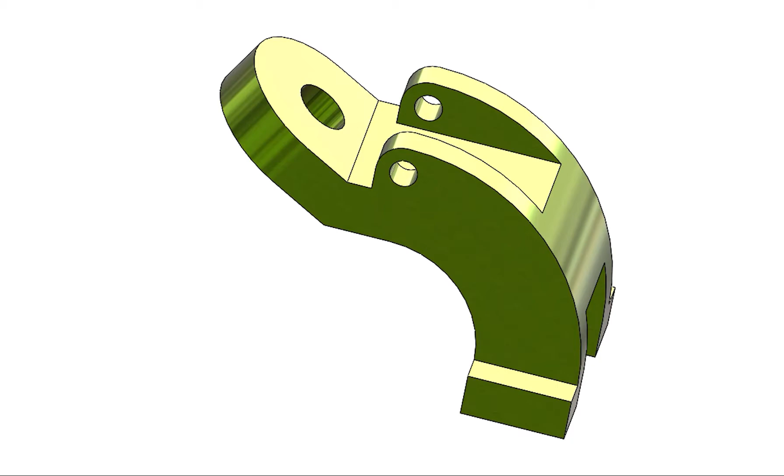This is a very simple part. It is 30 millimeter from here, 12 up, and 30 millimeter radius of this arc, and 60 millimeter of this arc. It goes up here, and this is the center, the same center for both arcs. This arc is 8 millimeter, with an 8 millimeter hole, 7 millimeter here, and 7 millimeter from here.

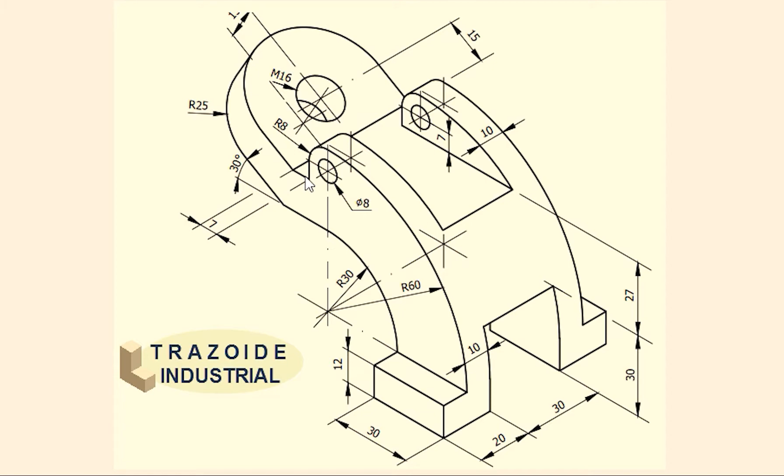So let's start. We'll go step by step.

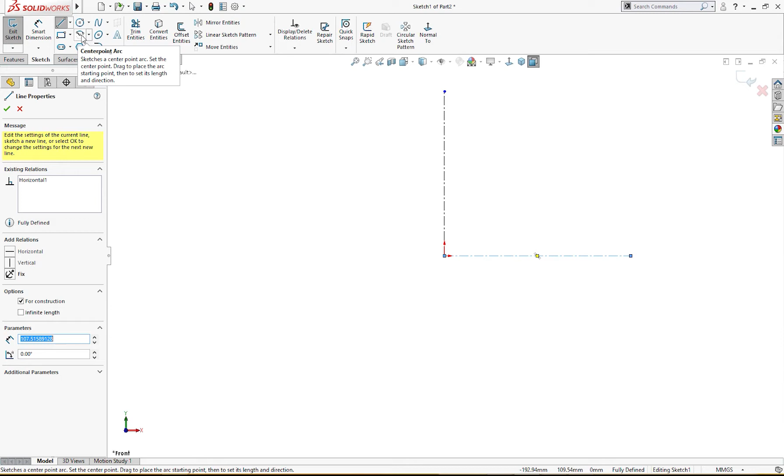A new part. On the front plane, I will draw a sketch of center lines like so, and I will draw a center point arc from 30 radius from here to there. I will trim the extra, and I will go from here 60.

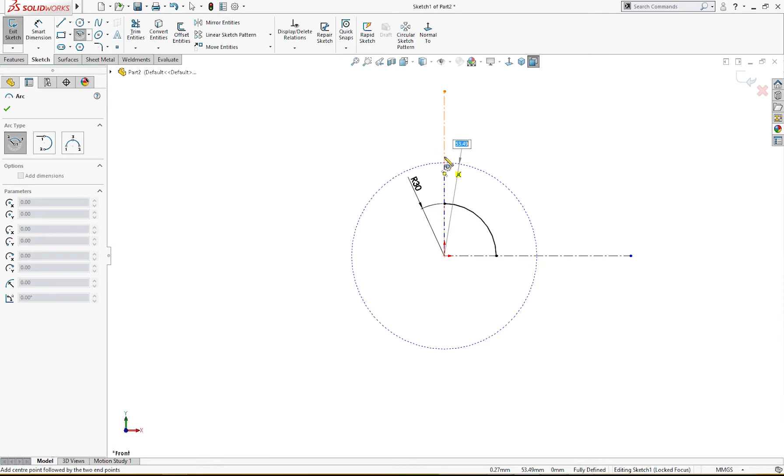I will trim this, take this and this. This radius is 30, and this radius is 60 millimeter.

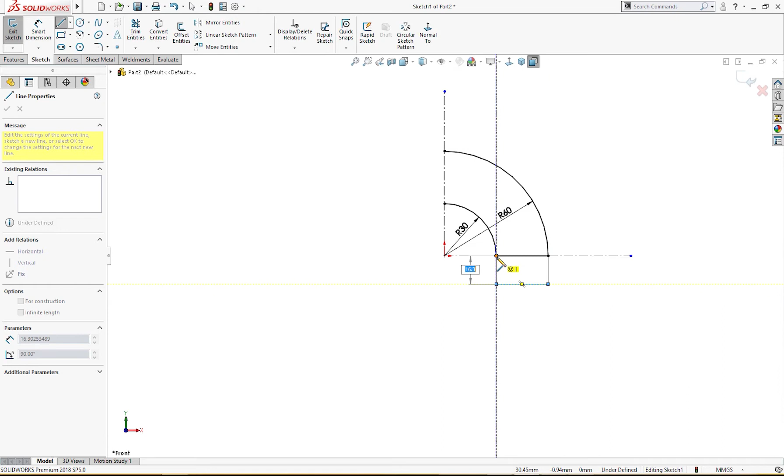I will draw lines to connect this to this, and again draw a line from here to here, here and there. This is 12 millimeter, and this is 30.

I will draw a line, go back again and convert it into an arc. I will go down 7 millimeter, 7 millimeter here, and 40 millimeter there.

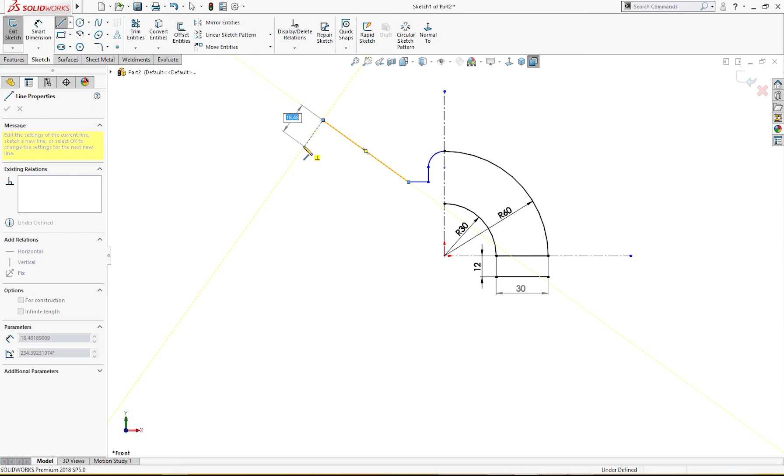Let me give the dimensions. This is 8 millimeter, this is 7 millimeter, and this is 7 millimeter also.

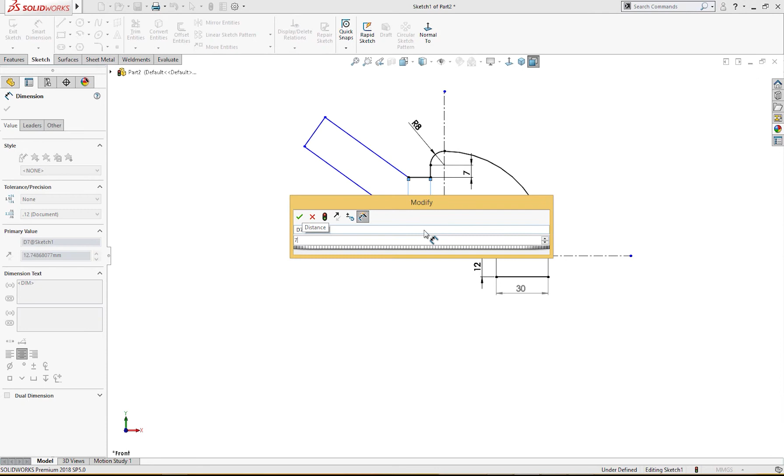The angle is 30 degrees, and this is 15 millimeter, and this from here to here is 40.

The sketch is fully defined. Only one thing left is a hole here of 8 millimeter.

Now let's extrude it. Everything looks fine.

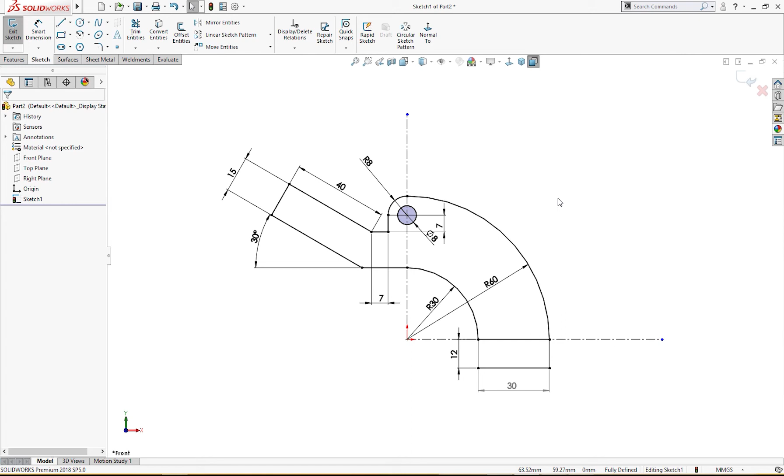Extrude, mid plane. I will extrude this, only mid plane, up to 50 millimeter.

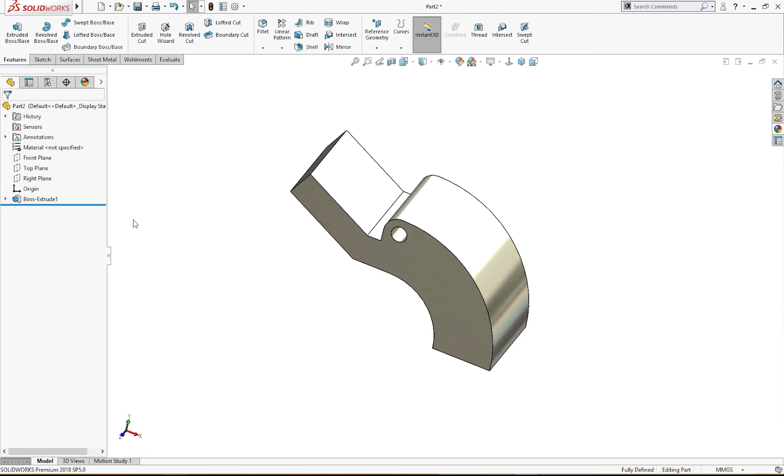I'll wake this up again. Extrude base boss, I will take this mid plane 70 millimeter, like so.

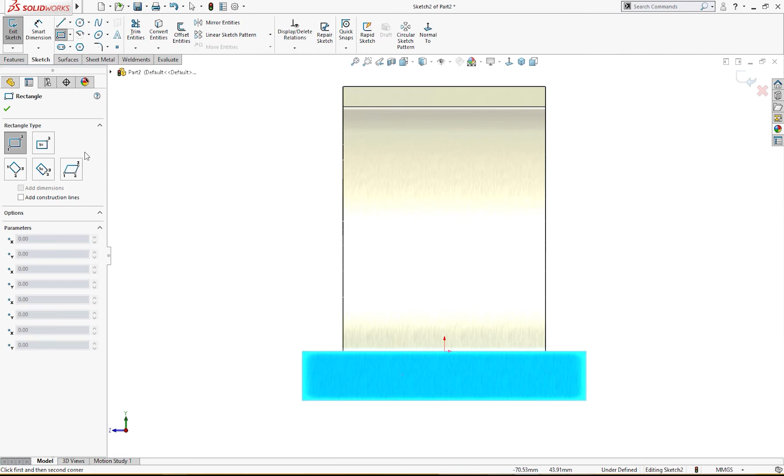I will draw a sketch here on this face, like so, and another here. Let's take it a little bit above. These two are equal.

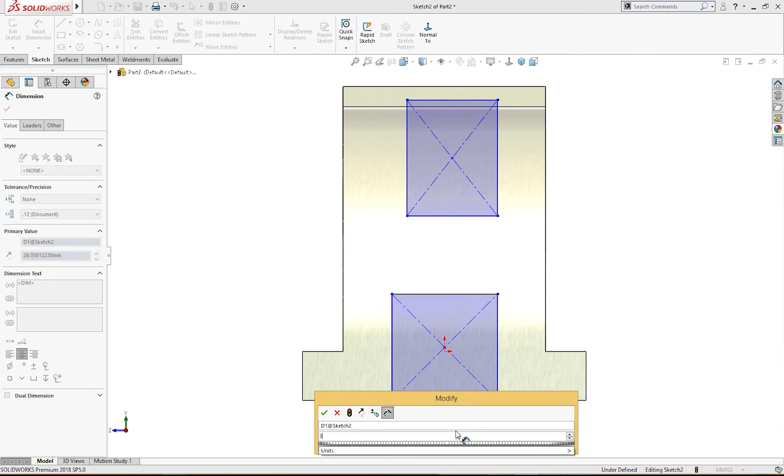This and this one are equal, and this is 30 millimeter, which is the cut. This and this is also the same, 30 millimeter. Let's define these 3 points into horizontal relation, 27 millimeter from here.

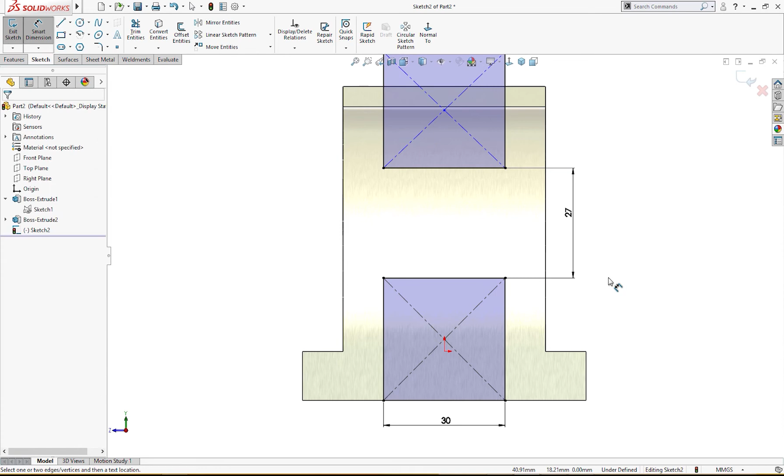We will give this dimension, any dimension will do, as long as it is above this face. I think it is okay. We can cut it now. Sketch is fully defined.

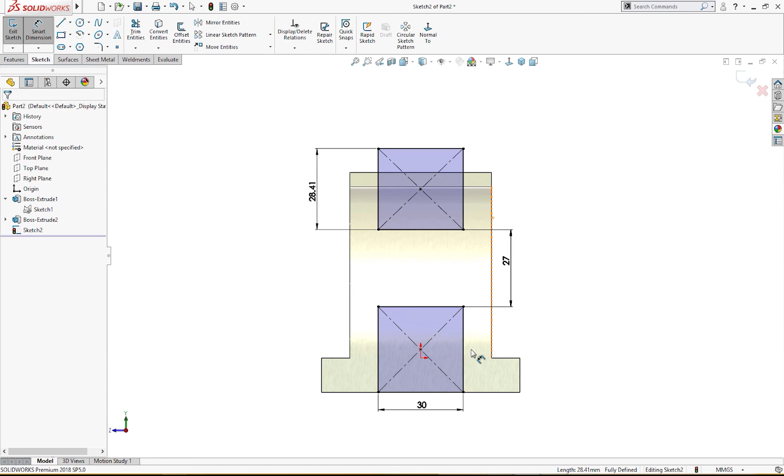This is 30, okay, this is 30, this is no problem, this is 30 also. We will cut it up to this surface. I will double click it, and there is no problem here.

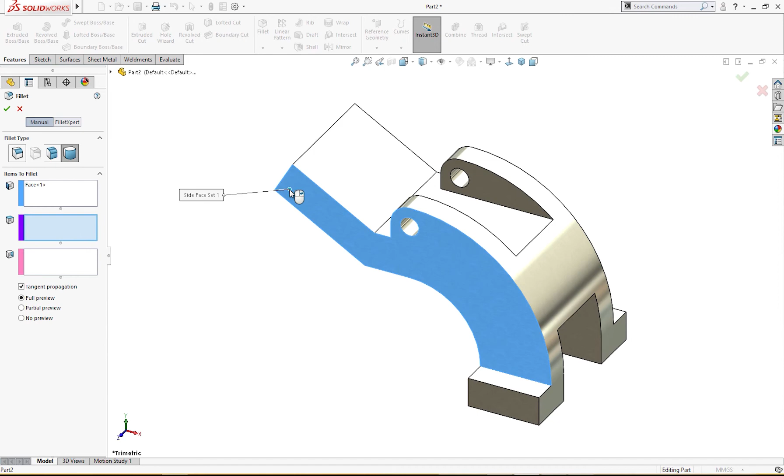This one is complete. Now I will go for fillet, full round fillet. I will click this, this, and this, like so.

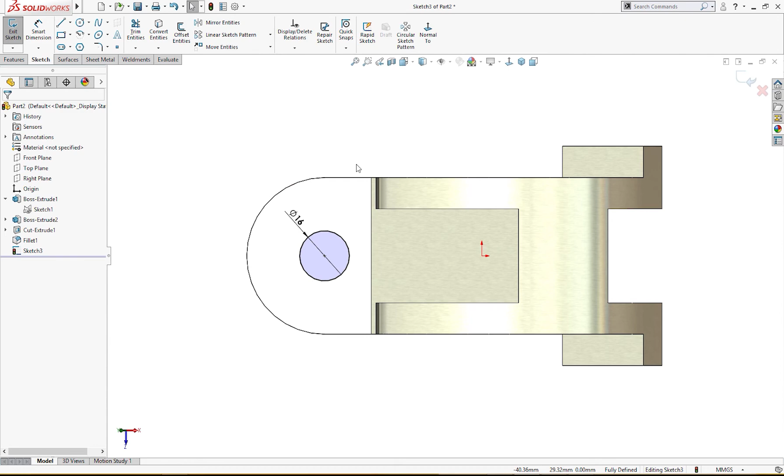I will draw a sketch here, a circle of 16 millimeter, and this must be 15 millimeter from here, because 25 and 15 is 40 millimeter, and 40 millimeter we made this from here to here, so this is automatically 15 millimeter.

Let's cut it up to next. Okay, the part is complete.

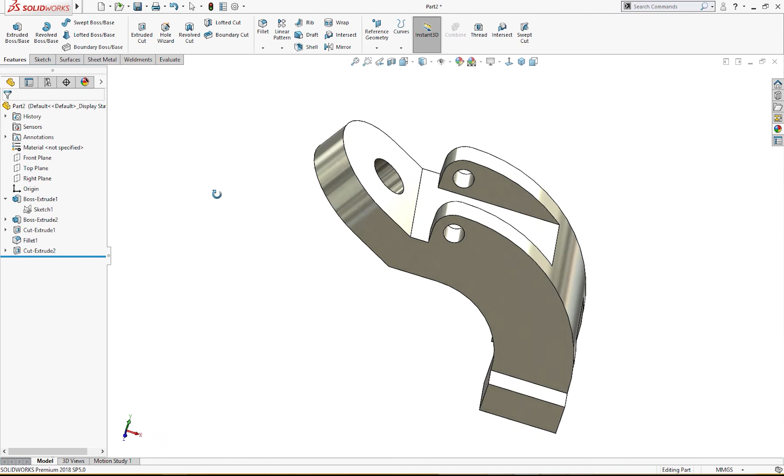Let me give it some color. I think this color looks good, I think. Okay.

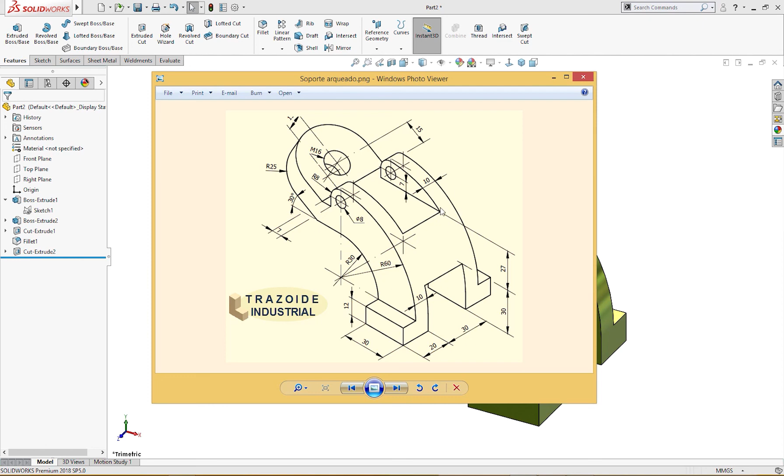Everything looks fine. It's 27 from here, 30 here, and 30 there. It looks good. The part is complete.